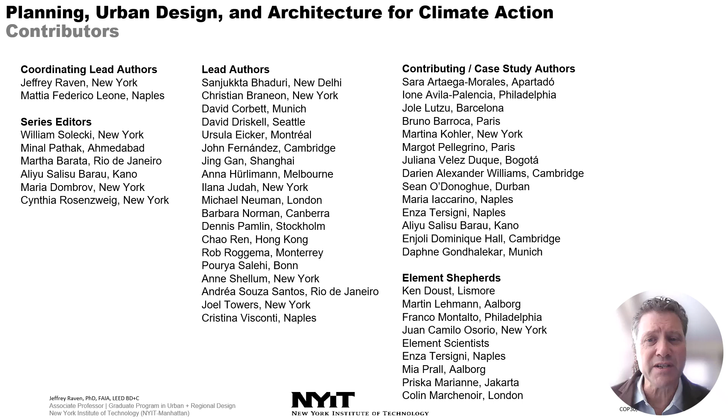The ARC3 Planning, Urban Design, and Architecture for Climate Action element, which we call PAD for short, brings together a remarkable group of expert authors and contributors from 23 cities across 15 countries, demonstrating the international reach and diversity of this city-centered collaboration.

Faced with cities' urgent needs for concrete climate action, urban planners, urban designers, and architects play a key role in developing climate action roadmaps for buildings, districts, cities, and regions across the world. The purpose of PAD is to motivate planning and design strategies for urban climate action that act in synergy with short and long-term social, economic, and environmental goals, delivering sustainable solutions tailored to local priorities.

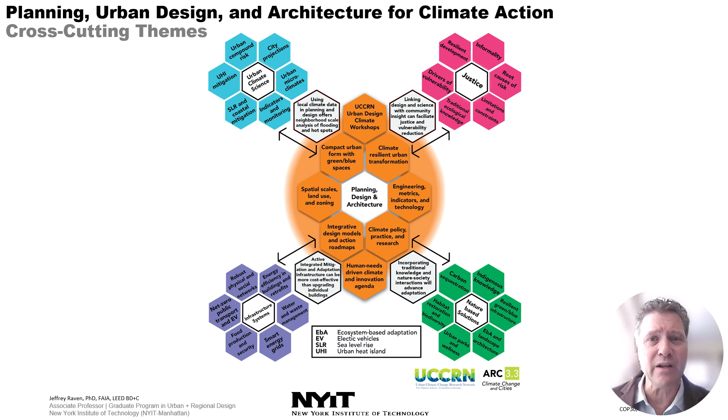The publication further benefits from thought-provoking forewords written by globally recognized urbanists, including the late, great Kongjian Yu, who lost his life in a plane crash over Brazil a few months ago. His visionary leadership and sponge city strategies reshaped how cities around the world can work with water and nature for a more compassionate and resilient future.

To quote Kongjian's foreword: this element underscores the essential position of cities in advancing the three interconnected pillars of climate action—mitigation, adaptation, and societal transformation. It offers a manifesto for a climate-responsive civilization. It calls for the reimagining of cities not merely as places to live, but as dynamic systems that sustain life, foster equity, and embody humanity's commitment to a sustainable and harmonious future.

We have a series of major findings and key messages. Major findings are significant new knowledge that emerged through the assessment process, and key messages refer to recommendations for new directions, efforts, and activities, with a specific focus on opportunities to speed up and scale up urban climate action.

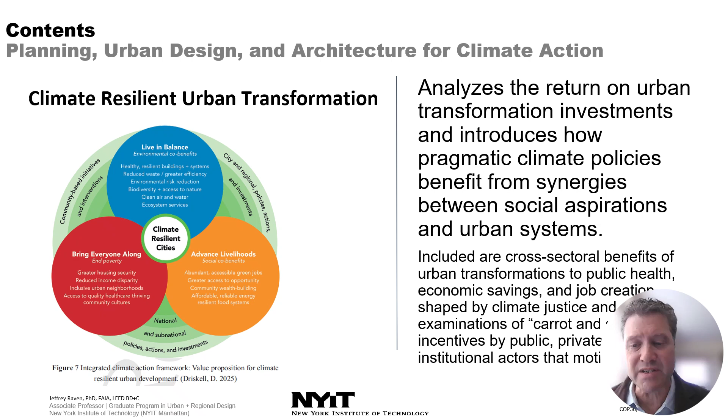Integrating mitigation and adaptation focuses on actions that synergize the two primary goals of climate intervention through the lens of applied research.

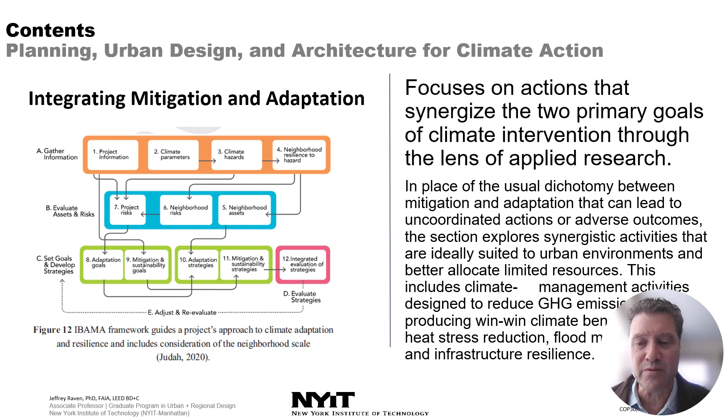Embedding environmental justice in planning and design integrates societal challenges into the fabric of climate-driven planning and urban design processes through engagement on community priorities, resilience strategies, decision-making, and project phasing.

Capacity building for urban decision makers and practitioners describes the current research on stakeholder processes and explores how community experts, policymakers, and practitioners can strengthen knowledge sharing, co-design, and co-evaluation practices.

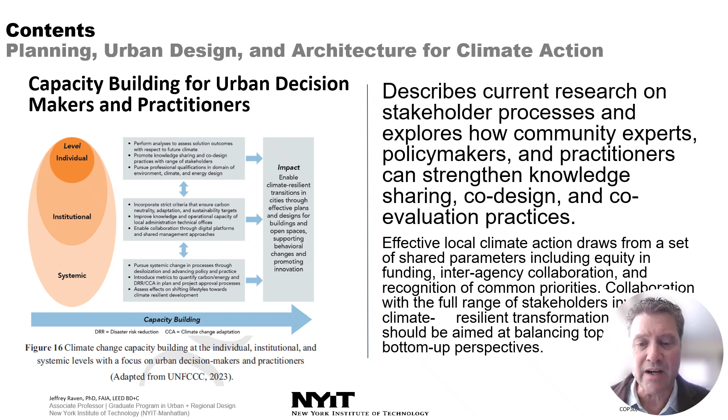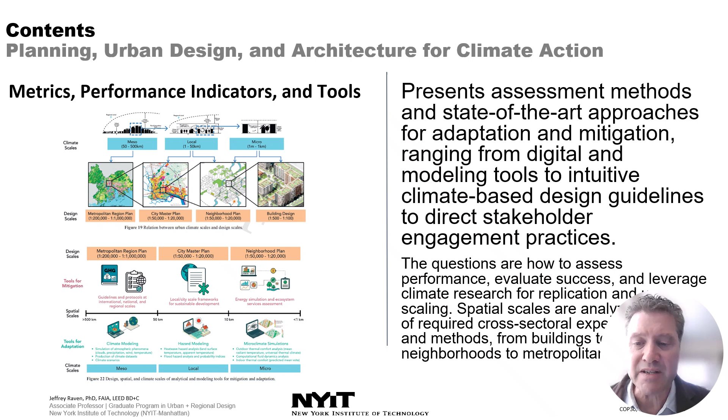The Metrics, Performance Indicators, and Tools section presents assessment methods and state-of-the-art approaches for adaptation and mitigation, ranging from digital and modeling tools to more intuitive climate-based design guidelines that direct stakeholders' engagement practices.

Finally, the Urban Design Climate Workshops describes an innovative action-driven framework developed to confront climate change in cities and identify opportunities for cross-sectoral refinement. It provides examples from multiple urban design climate workshops with urban design practitioners, researchers, policymakers, stakeholders, and graduate students working side by side.

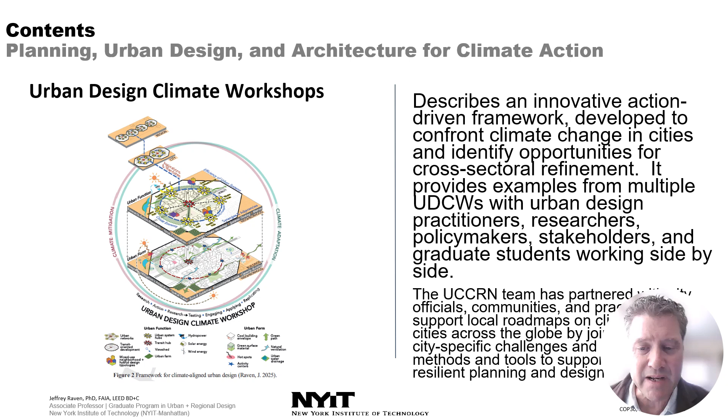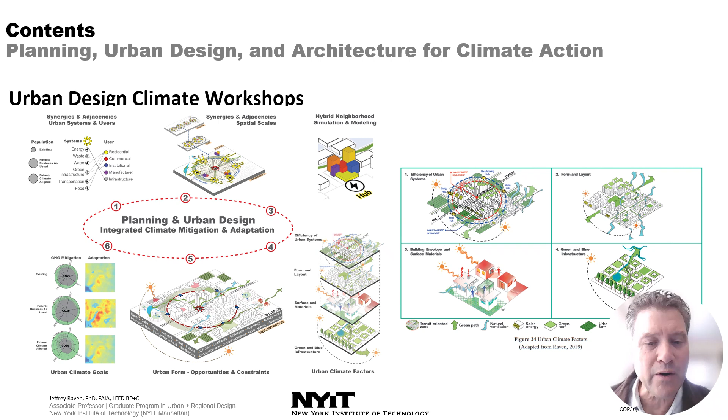As a diagram for the process, you see here six buckets of the urban design climate workshop process: the planning and design process, comprising synergies and adjacencies between urban systems and users; synergies and adjacencies across different spatial scales; hybrid neighborhood simulation and modeling with emerging and exciting typologies; the urban climate factors, which form the basis and pillars of this work; a series of opportunities and constraints specific to the urban districts where the workshop takes place; and finally key climate, planning, and design outputs, focusing on quality of life as well as mitigation and adaptation.

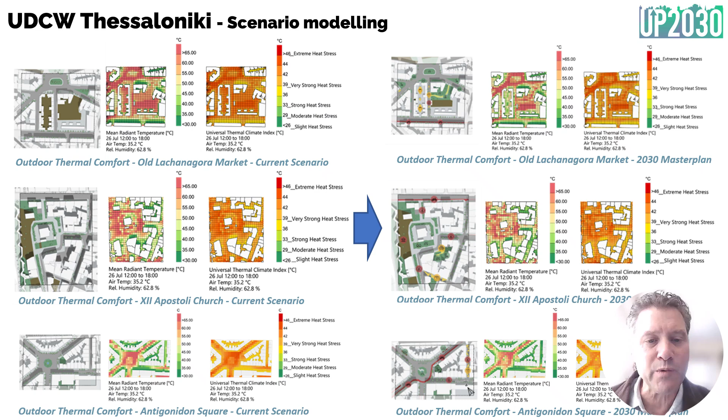Here are a couple of recent case studies from urban design climate workshops in Thessaloniki and here in Rio de Janeiro.